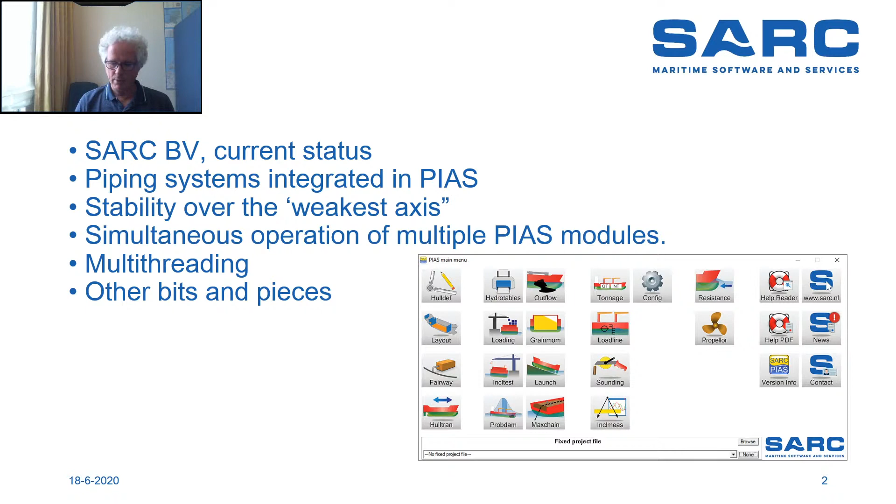One of the things that we have recently amended again was our PIAS menu, which has been developing over the years, and we have now icons for every individual module within our software. But I will get back to that later in the live demo.

Current status at SARC. Well, not current, but we were established in 1980. That is always a current status, of course. That will never change. We are located in Bussum. The current status is that we will actually be moving, but that's only 300 meters, somewhere within the coming year or so. We have 15 employees.

Yeah, we spend our days programming and doing project work and providing support and training, etc. All the work you would expect from a software house, plus the engineering and services we provide. There may be something on that in a further webinar later on.

Then, the first technical item for this webinar. Damage stability, including piping. For damage stability, there is more and more focus on progressive flooding.

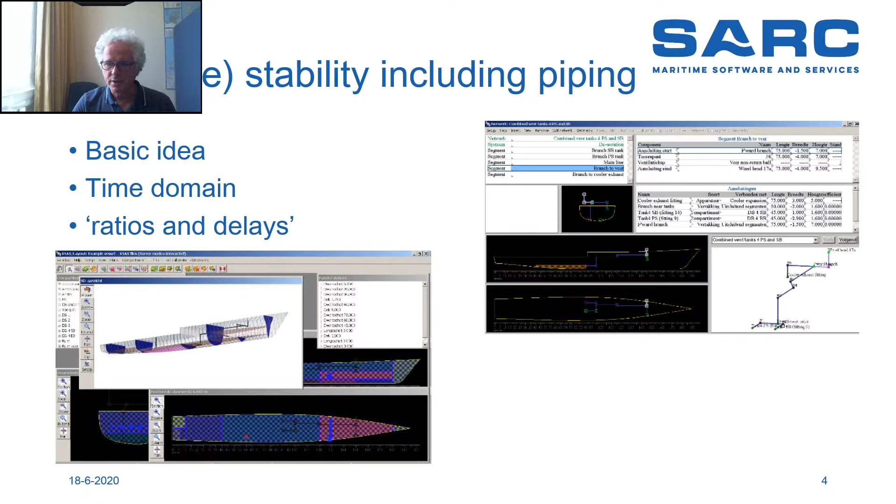I should kill the camera, otherwise I'll be obscuring. No webcam. There we go. You've seen me enough, I think.

I hope. Damage stability, including piping. The basic idea is that we would not make logical connections between compartments. So if one compartment is flooded, then the other may or may not also be flooded. But we would replace that by a definition of the actual connection between the two. So not a logical connection, if this tank is damaged, then that tank will be damaged, but an actual pipe.

And if the connection is defined between two tanks, then the software will figure out that the connected tanks are maybe simultaneously flooded, or one will follow the other, depending on the properties we define for these pipes or connections. An opening in a bulkhead may also be a connection, or a pipe with zero length, if you like.

And by providing attributes for these pipes and connections, we can create calculations in a time domain. If we define the resistance factor and the diameter of some pipe, or some other resistance of appendages like knees or branches, then we can predict. We know the situation of the vessel, we know what's in the tank, we know the level of the outside water, so we know the pressure differences over the pipes, and basically we can run all calculations in a time domain. And that would be a huge step forward in taking progressive flooding into account.

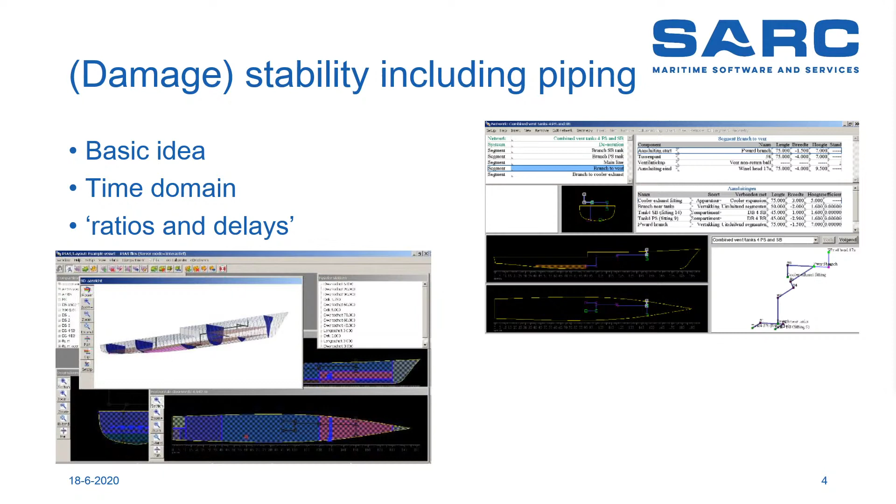Heeling over the weakest axis. Typically in shipbuilding, of course, transverse stability was the big issue. Even in the old days, we would even skip trim, so it was really only transverse stability. Nowadays, we have free trimming of a vessel, but that's not the same as calculating your GZ along the weakest axis.

For a vessel as wide as long, stability may be equal in all directions, or for a vessel slightly less symmetric, it can still be that at some specific combination of heel and trim, some opening would be submerged first, and that would be the most critical path in your GZ curve, for instance. Well, we have that as a setting. I will show you later on.

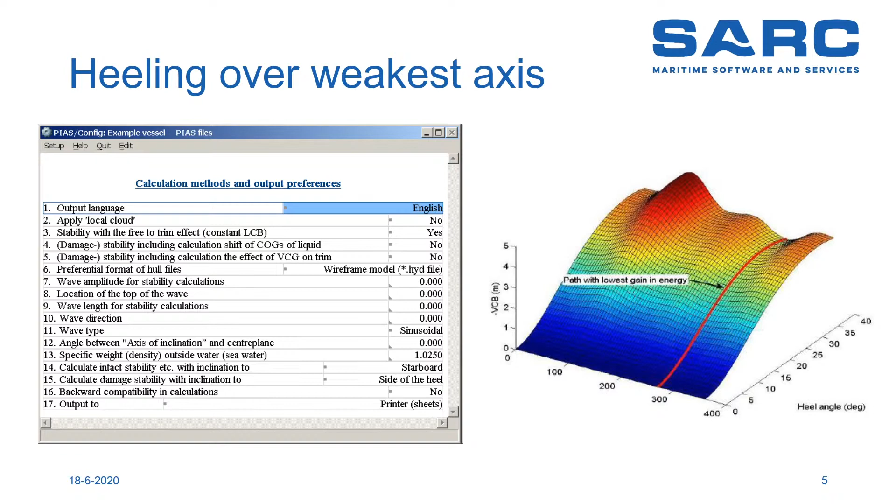How this should be implemented in relation with the regular stability requirements is something we will figure out as the comments by classification societies appear, because I don't think the rules provide for such answers at this moment. We have not found a direct comment on how to check stability along the weakest axis. Possibly some opening may be more critical in one direction and the area in another direction, etc. So what is the direction of heeling for the GZ which is most critical? It's not clear at the moment, but we'll figure that out when the comments come in.

Next slide, the local cloud.

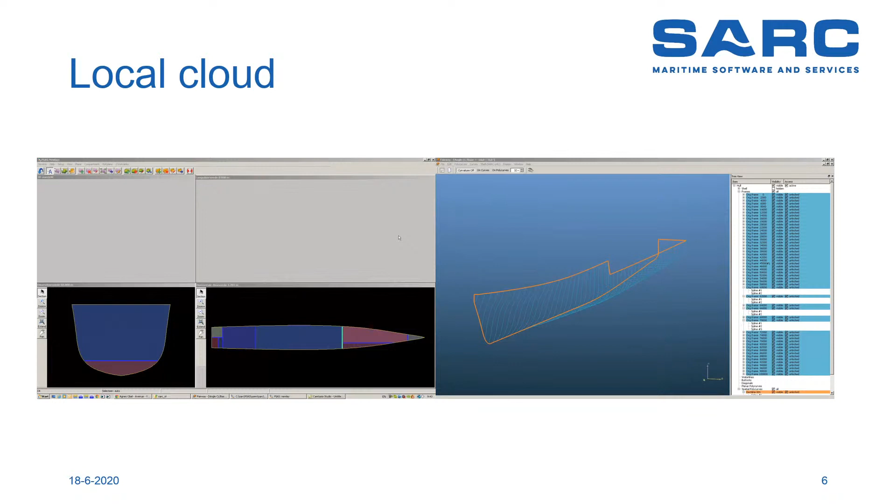That's a fancy name, or, well, it's a name that we thought of for basically complete interoperability of different modules in PIAS. What you see here in a split screen are actually two different PIAS programs. To the left you see Layout, and to the right you see Fairway. And this is a movie which should start if I press here. Yeah, it does. On the right hand side you see Fairway. We're going to play around with that, and we've done this in a movie for the speed of things.

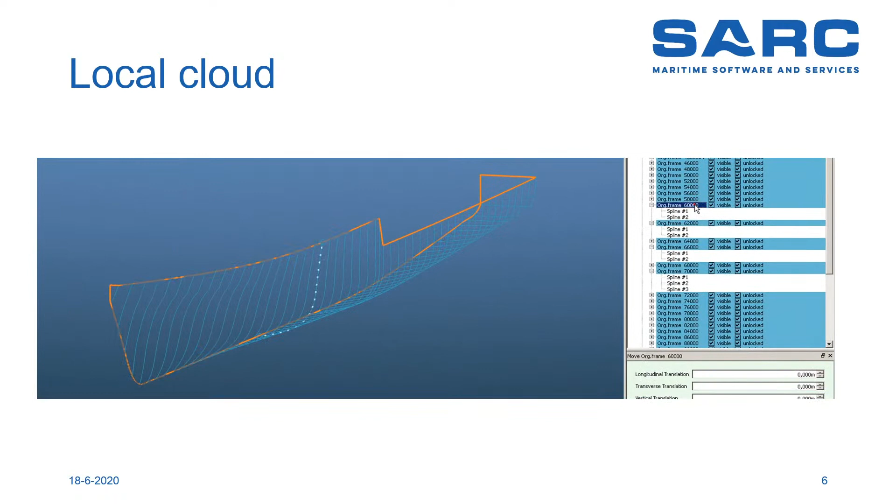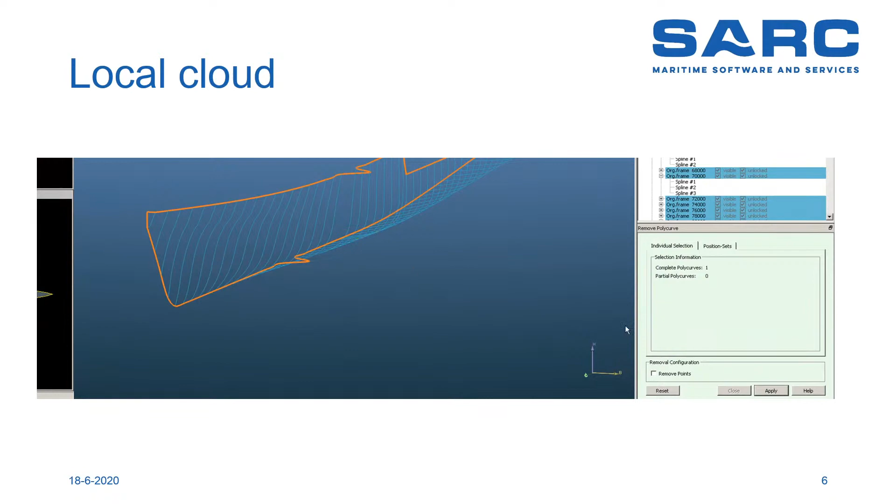And for some other technical reasons we need to update this plan, but it's something we have been developing, and it will be available somewhere in the future. So you see, without any file transfer, this was actually taken in one shot. So without any file output or transfer of data or whatever, one module creates a change in the hydrostatic data of a vessel, and in another module, in this case Layout, you will see the tank flip back and forth with the modification of the hull form.

This is a brief one. It will restart again. No problem. The idea here is that we can open any PIAS module, and that the PIAS model is loaded in the local memory, and bits and pieces of our software are boss of the data in there, and other bits and pieces of our software will read the data from there in the shared memory. So the entire model is loaded, and we can use multiple different modules at the same time.

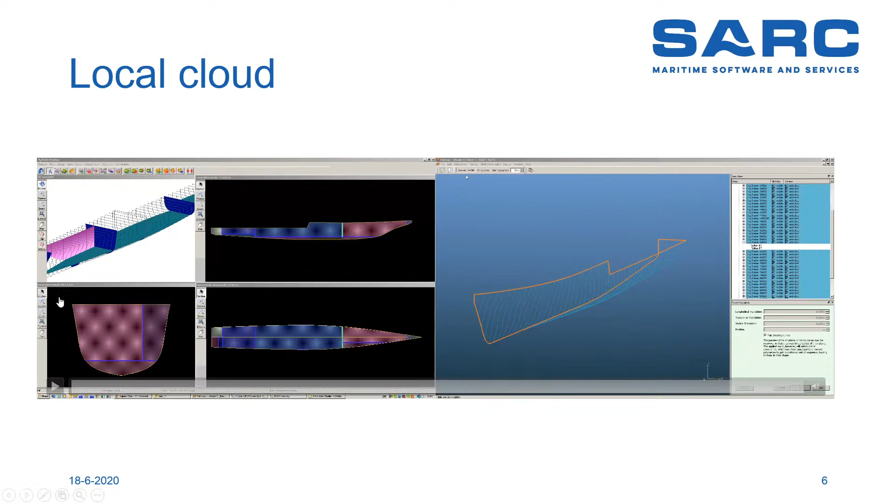And you can come up with all sorts of practical use for that, checking your compartment volumes while you are working on the hull shape, or checking the intact stability while you are working on the compartments, etc. So there's another example there, actually a three-way split screen, four actually. This is something I should introduce. These are the hydrostatic monitors. That means that we have got a monitor for KM with a minimum and a maximum value, and for the volume and for the displacement. So there are some criteria set for these, and this is just a different representation of hydrostatics, of course.

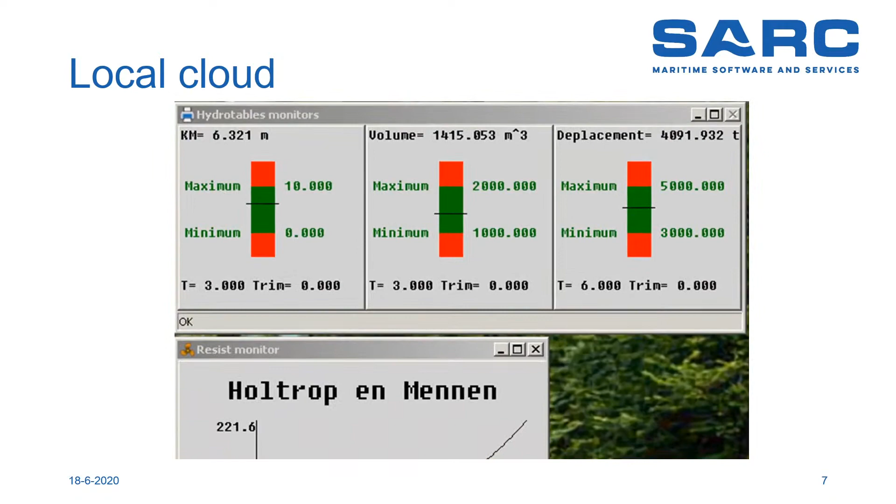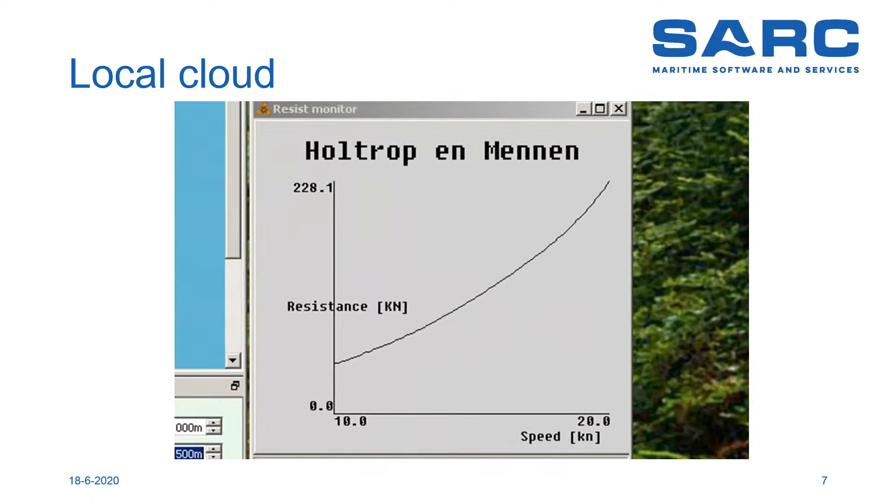If we start this again in Fairway, we change a frame, and that frame would of course change hydrostatics. You will see that happening in a moment. There we go. It flips slightly. The values are updated there without any file transfer from one module to another. Then, because of the changed hydrostatics, the resistance prediction by Holtrop and Mennen will also have, in this case, a slight variation, which is not realistic, of course, because Holtrop and Mennen does not take into account the actual hull shape, but only the derived values from there. And that will also affect the speed and power graph.

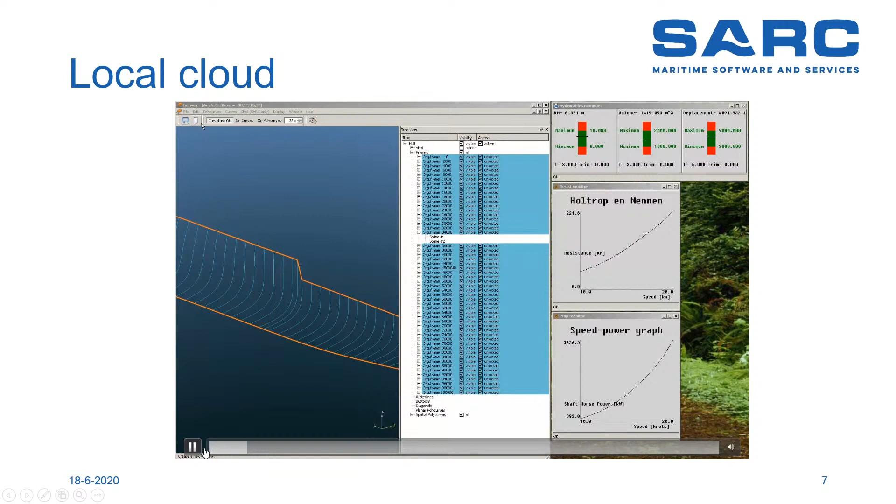If I can move slightly back here, thought I could. Oh, it just restarts again. I can drag it directly there. So this value will be updated in the speed and power graph. The total power required for a specific speed will go up because of the changed resistance. And so you can imagine all kinds of applications for this local cloud, depending on your design problem. Yeah, open the modules as you see fit.

We need to revive this module. It has worked properly, but we have changed so many things, and the storage of all modules in the local cloud is not updated accordingly because we didn't sell it yet. But that will be revived somewhere in the near future, and yeah, just to show what we are doing at the moment. Okay, next slide. Okay, we're halfway our presentation, I think, time-wise anyway.

Multithreading, that's another one. Performance of computers has always doubled, Moore's law, in a year and a half. But currently the processors do not live up to Moore's law anymore. But we can, of course, switch on multiple processors if your software is prepared for that. Well, we have done that three times actually for multithreading. We started out with dual threading because the computer came into play with two CPUs. So we went along with that, and then we had dual threading.

Then eight cores became fashionable. We did that, and unfortunately that is a different system for multithreading. We could not just set the number of two and raise it to eight and have octo-threading. That was actually a redesign in another system of, let's say, the administration required for multithreading, because you can, of course, calculate every heeling angle for stability at the same time if you've got enough threads available, but you need to merge them again into a single GZ curve afterwards. So there is a lot of work involved in our software to make this happen.

And the systems for the administration have changed over the years from dual to octo and now Viginti. I'm told that's 20 in Latin. So we can now run up to 20 cores, and we have high hopes that that will just scale up if more CPUs will be generally available in PCs. 20 cores is now a machine that you can just buy off the shelf, basically. And we can accommodate that.

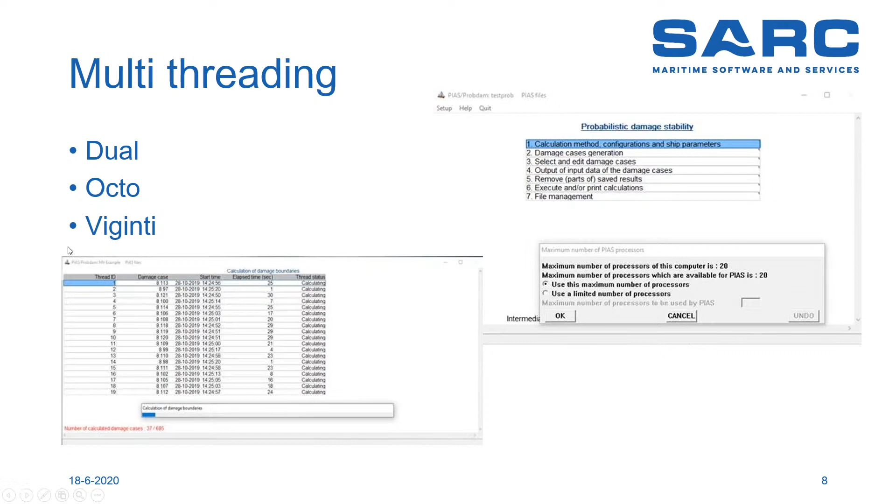Then, look, that was one. No, actually, I had only 9. I was expecting 10, but we had only 9. Some other bits and pieces in a live demo. So the PowerPoint is done for now. This is our main screen. Well, that was already on the second slide, I believe.

One nice feature here, there's an exclamation mark in the news, and that refers to our website. So if I click on that, it opens on the other monitor, but I will drag it in here. You may have seen this, or you were invited directly through mail. If there is news and I open it, you get the latest news. It's a link to the latest news, and now the exclamation mark is gone. So we try and keep you updated of our news there.

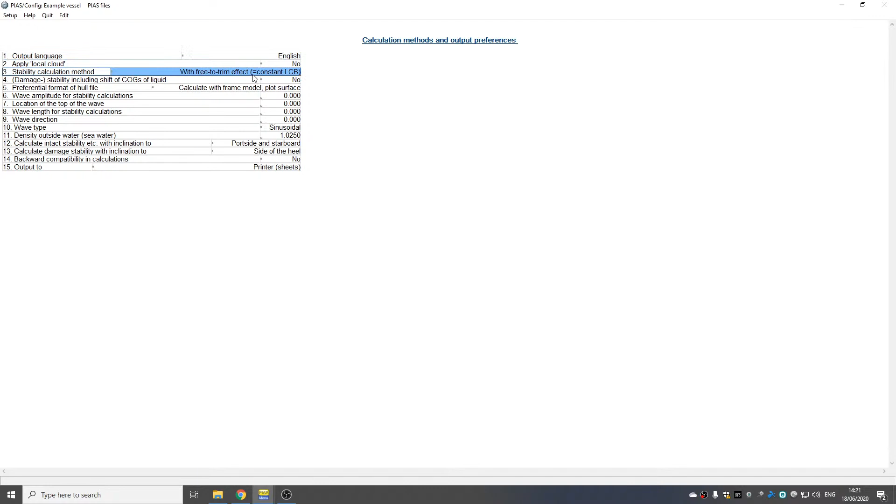Some further things. There are some settings. I want to show where some of them are. The stability calculation method, perhaps that was a bit quick. Again, in the main menu there is the configuration module and the calculation method and output preferences. The calculation method there is either with fixed trim, that's the old-fashioned way. Trim was remaining 0 to make a fair comparison with booklets with hydrostatics for 0 trim and with cross curves for 0 trim, but then free to trim, of course.

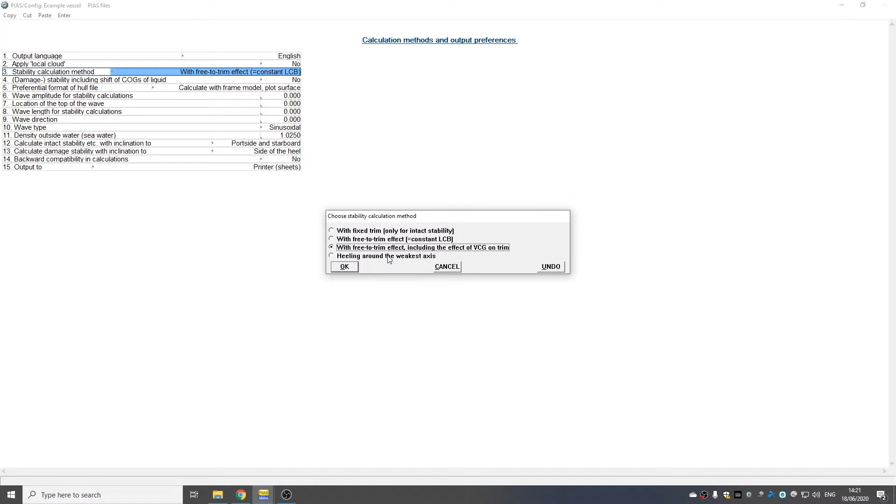Free to trim, including the effect of VCG on trim, because of the trimming, well, look it up in the manual for the specifics. And then we have the heeling around the weakest axis, which was just explained to you. You can just switch between the two and it will just work if you have the module, of course, because we don't share that one for free.

Then we have some other things. Previously you would have a few choices. You could run stability calculations to port side, starboard, or to the side of heel. So if there was an initial asymmetry in your vessel, either TCG or TCB or both, you'd get an initial angle of heel, and the rest of the calculation would be to that side.

And now we run them both, which is more fair, of course, because you don't know which one is more critical. Some opening may be lower on the starboard side, but your deck may be higher there, so anything may happen. And the safest way is to just calculate stability both sides. And we do that. I will show you an example in a moment. Then I have a list here next to me, so I should check them on that.

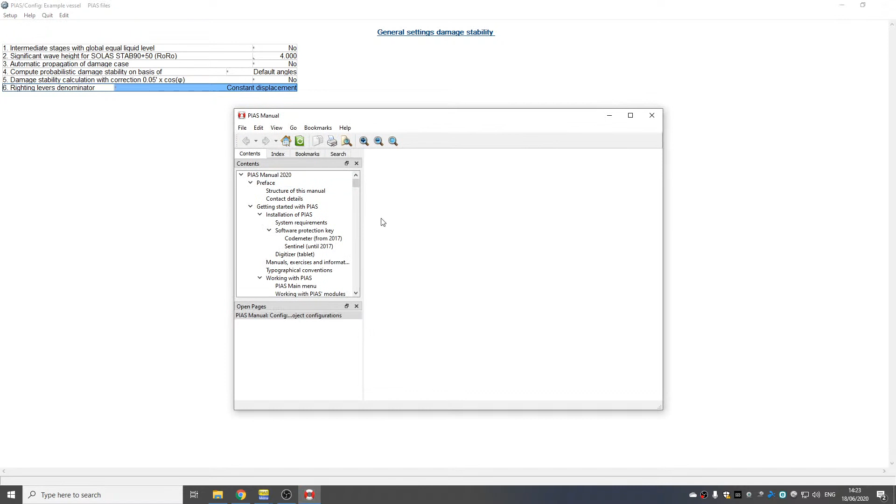For damage stability calculation, typically we use constant displacement. There's an entry on that in the manual for this particular menu. If we press help, F1, that's not new, but some of you may not have realized this, our help file is now context sensitive. So we open here on the right page: the righting lever denominator is number 6 in the menu, and also number 6 here. So if we go there, there's some explanation on what we do. That applies to every menu. If it doesn't, we made a mistake, so please inform us.

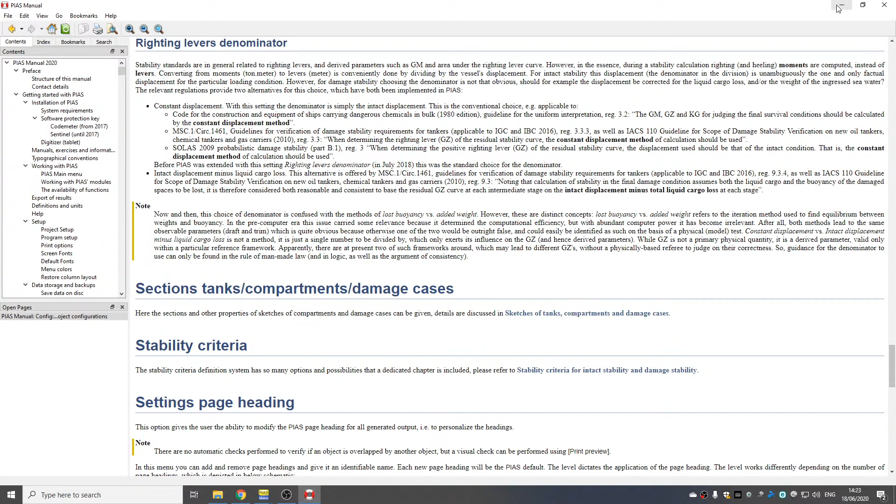What have we? Now we have the intact displacement minus liquid cargo loss. It says cargo, but basically all liquids in damaged tanks are considered to be spilled out.

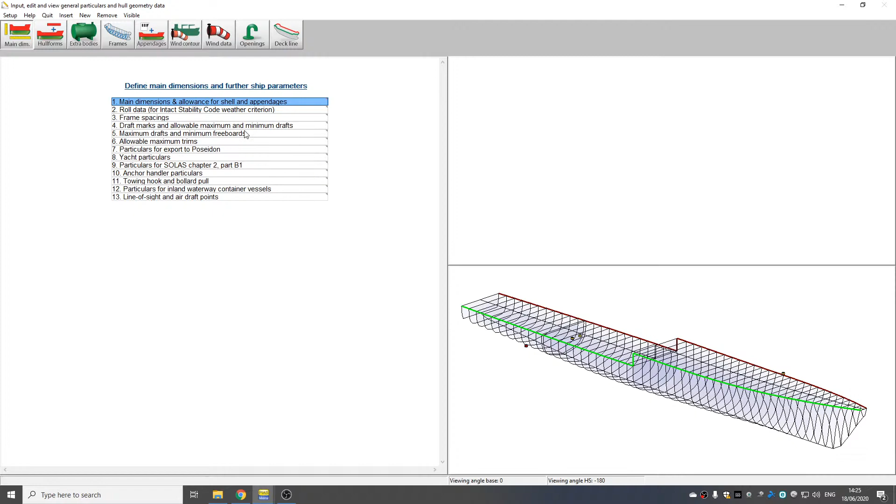That is what else I wanted to say. And I want to give you some example of things that have changed in HullDef, our hull definition module, for those of you who may watch but are not familiar with PIAS. Something has changed in the appendages. And what has changed? Well, they are no longer part of the frame. So the frame stops here, but it has a flat deck here. But the hydrostatic model is this, and what you see here on the right and lower side.

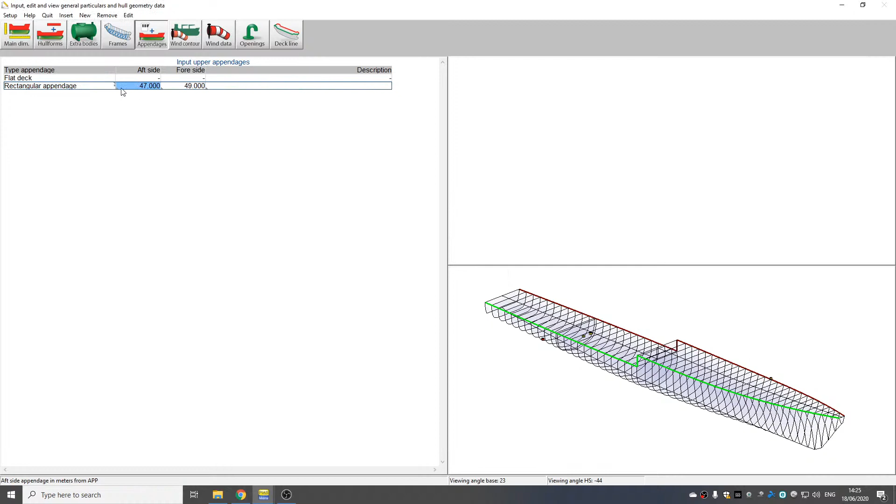But the appendages, even if I were to include a deck house, I haven't studied this in great detail now, 47 up to 49. Let's create a deck house there, a rectangular slab there, which will be 5 meters wide and 12 meters high. It's too short actually, 51 there. Two frames are affected. I should of course include double frames, otherwise the discontinuity in the sectional area curve will not be taken into account correctly.

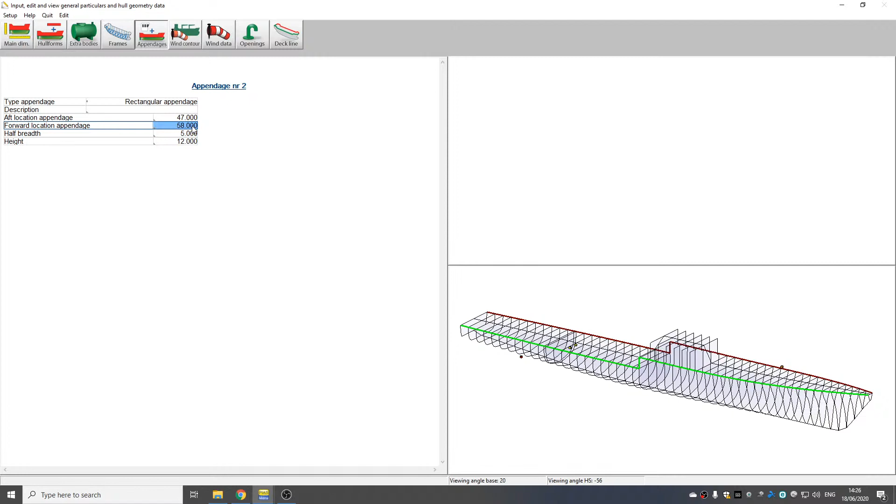But you see, I don't need to add them to the model anymore. They are done automatically as we go along and change bits and pieces here. So you get direct feedback, and they are added to the buoyancy model, to the hydrostatic model of course, but they are not included in the frames anymore, and that makes life a bit easier to keep things consistent. At least that is our aim and hope for this.

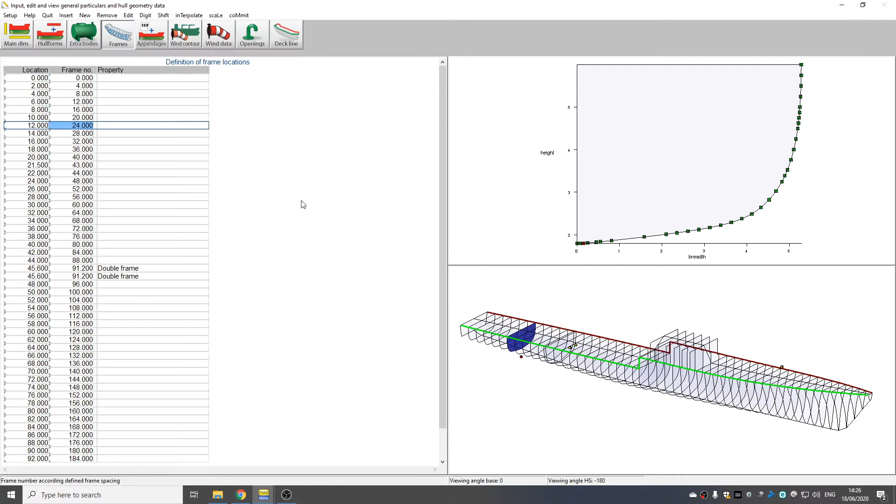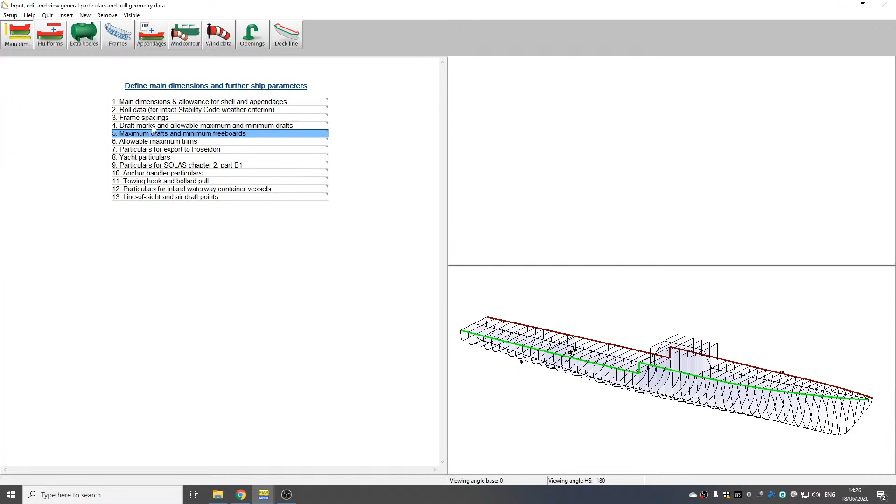Some other feature that is quite useful, has been around for quite a while, but not everybody knows this. Let's say we have a draft mark on frame number 2, then I can just copy this lot, Control C. I can paste it in an Excel sheet, but I can also go to the main dimensions, draft mark, no, not the maximum draft mark, I always make that mistake. There, a new draft mark. There, a new segment, reference height minus 0.015, a plate thickness 0.015 with a minus. I keep missing the 0 apparently.

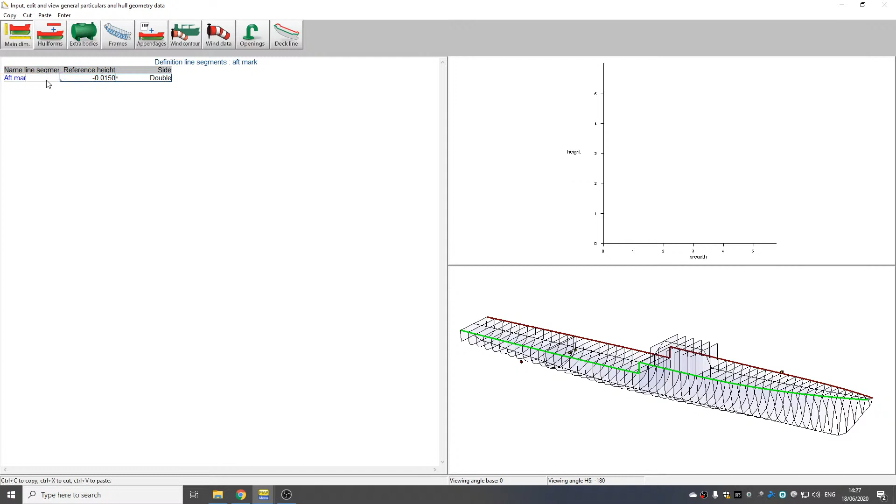Draft mark, open that up, 1 new point and Control V. There I've pasted everything, and I can put this all in the right position, which is 2 meters for frame 4. So there we are. Here we have the draft. I should have copied another set, but this would be the purple line. There would be the new draft mark. I just copied and pasted these coordinates from one place to another, and that may be very helpful for any data you want to copy or move.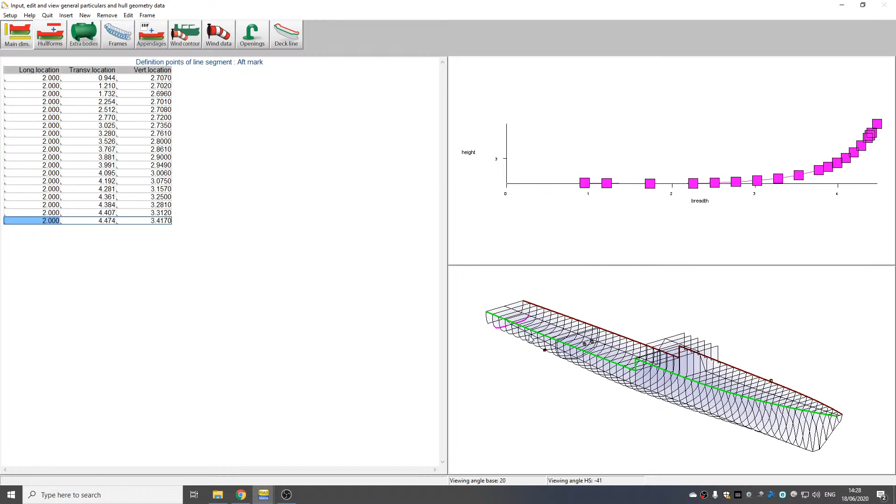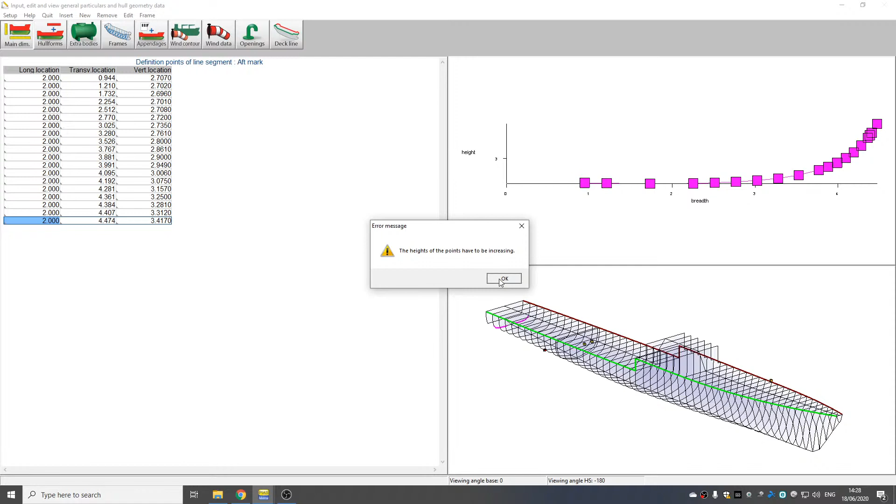Yeah, we've been at it for almost half an hour, and the idea was to end up somewhere between 20 minutes and half an hour. So what I will do next is look into your questions. This frame is slightly silly, so remove, and now I can do this. I've defined a draft mark. I will check on your questions. One moment.

Denise asks: would there be any time limit spent for each damage case, in particular a damage case with 3 days? When would it stop? No, there is no time limit. The calculation will run as long as required. We may implement a manual break there. In particular, we could also spend a week. Yeah, it's a fair comment.

Yeah, that could happen for any particular damage case. You could possibly kill the calculation and switch off that one damage case if such is allowed, or check intermediate results, and I will make a note if we can basically on the fly switch off one damage case, skip it and move on to the next, so that you can complete the calculation. I will make a note, but I'm not making any promises that we would implement that anytime soon.